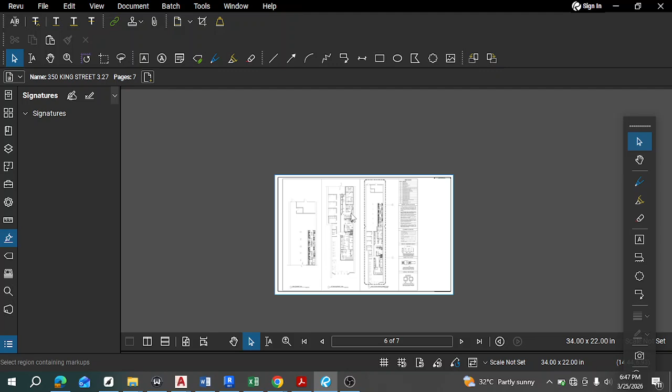Let's look at another design for gas plumbing, right? This is a very large building. It's a commercial building. It's a pizza place and a bar. It falls under the category of bar and dining, right? You can see from here it is a very long building this direction, right?

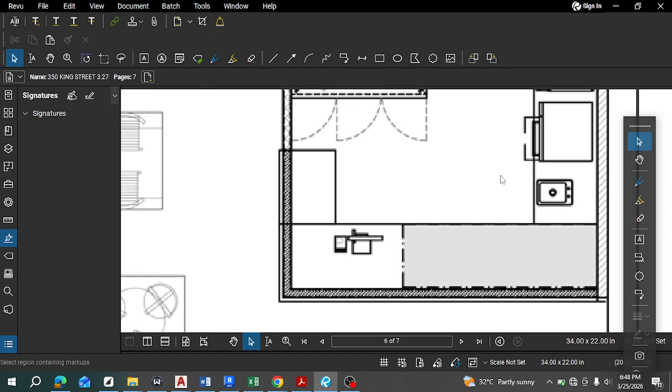Then this is part of the architectural file. They went through the stress of breaking it down for us to look at it closely, because if you zoom in on here, a lot of things get blurry, right? But I mean, they cut it into two portions. This is one, right, from here, and this is two, which is this other part. There's almost two halves, right?

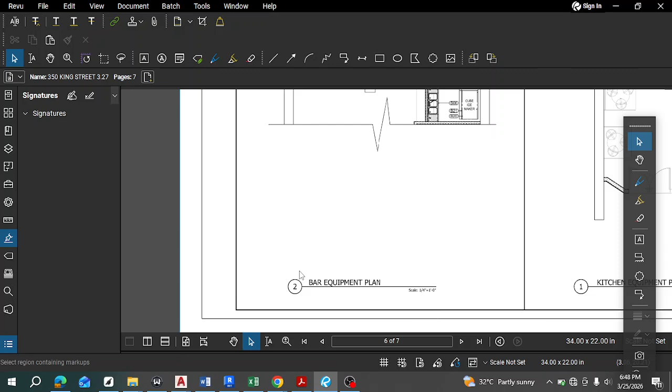So now they came here and showed us what each of them is, rather. They even gave it scale, right? Let's see, the scale here is okay. This one does not have scale, but this one has scale, right? This scale is very important. I know I don't usually talk about it a lot, but it helps in measurement. All buildings should be drawn to scale, right?

Because the whole point of scale is basically saying that every 1/4 inch, every one quarter inch, is equal to 1 foot, right? So that means this could be up to 20 times as large as it is, right? So what this basically means is that if you measure a quarter of an inch here, it is equivalent to 1 foot. Right, so it's important, and I think I've shown you how to do it, but I will show you again today, right?

So this is 1 and 2. I mean, I would have placed 1 here and 2 here if I were the one arranging it, but this is how we came across it, right? This one is the bar equipment, as you can see from here. So this is everything bar related. There's a lot of things really. They even had to start tagging it with numbers, right? With B standing for bar.

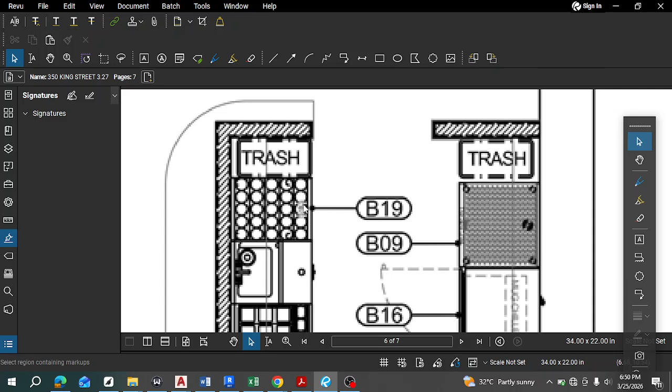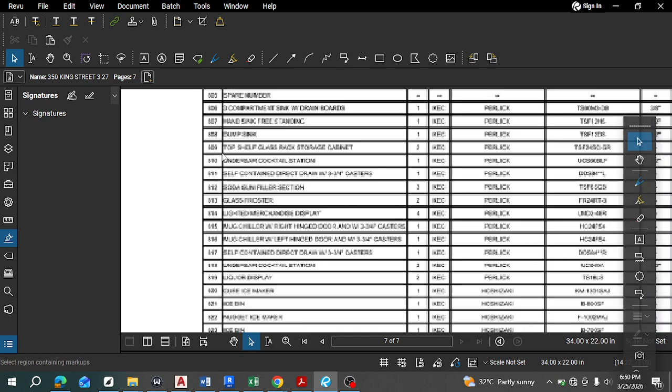So you go look closely. I mean, we are not doing the mechanical and plumbing for this building, right? If not, we would have gone into detail. This is an ice maker or a sink, right? This is B16. Okay, I'm not sure what it is. They actually gave us the schedule to show what each of these things are. That is B16. Let's go for B16 here. Okay, that's a mug chiller, right?

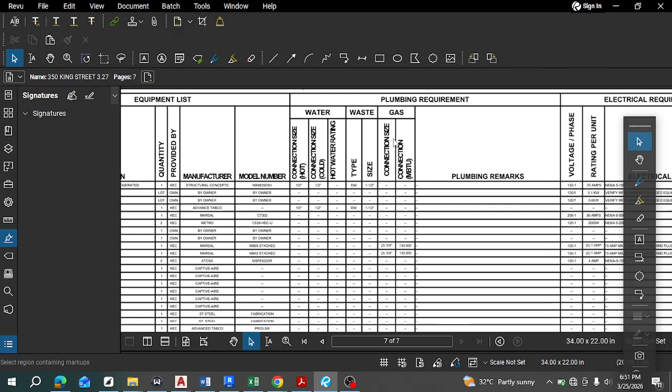So the whole point of this now, after they give us all those tag numbers, this is the rest of what they mean, and to show if it's a plumbing equipment, if it will require plumbing, if it requires electricity, and this is for the plumbing, because gas is also part of plumbing as I mentioned before. So the size, the connection size, and then the quantity, the provider, the manufacturer, all that, so I can research on it, right? And then they went the extra amount. No, this is not what I'm looking for, right? So let's go back to that page, which is here, right?

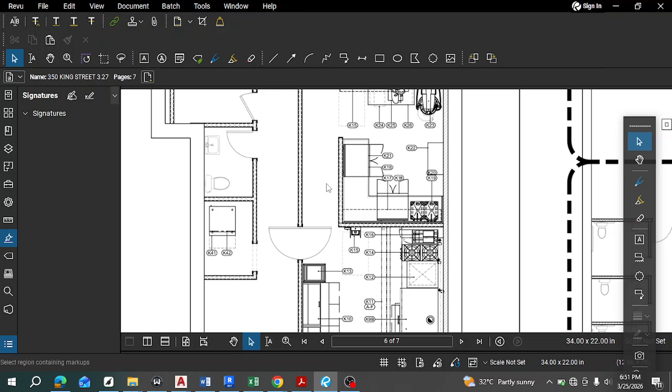So then we go into the other side, which is the kitchen, right? So the kitchen usually has a lot of gas connections, so we'll see what all these things stand for. Then we'll be able to tell. The first part of this project should be understanding the building, what it is for, what the sections are for, the flow into the building, right? The flow into the building and through the building too. So I just want to focus on some things, right?

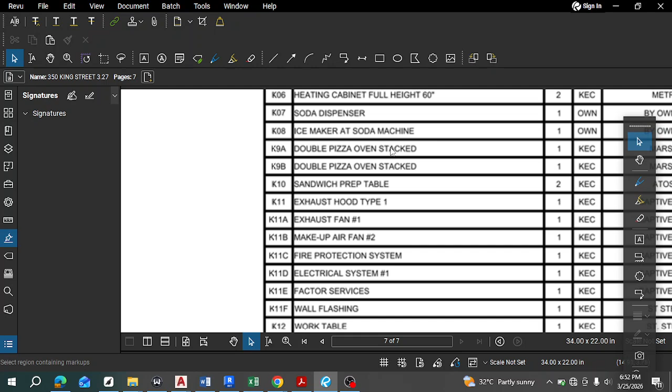You have K16, K14, and K9, right? These are equipment that require gas. K9A, K14, K16. Let's go and look at them. That's K9, 14, and 16. Okay. K9A. That is this. It is a pizza oven. Right. This is the manufacturer and the model, and then this is the connection, 3/4, right? And this is 130, which is the BTU.

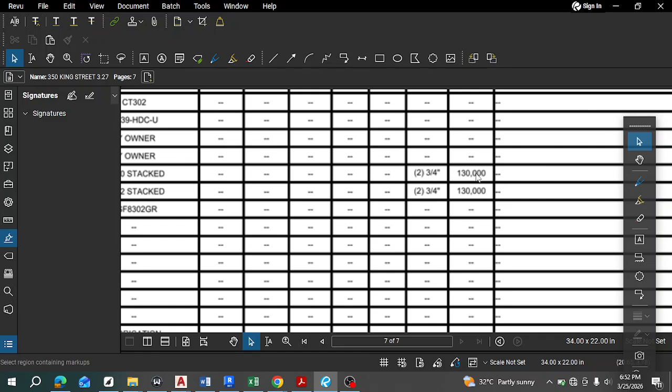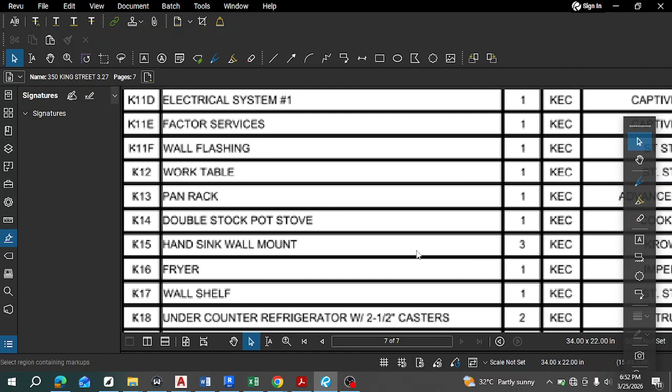Remember we talked about the energy consumption, right? So this is this, right? Then you look at the others. So we talked about K9 now. Then K14. K14 is a double stock pot stove. K16 is a fryer. I've not seen many of these things before, and I don't know if you have, but at least you can look them up to see how they work, or what they look like.

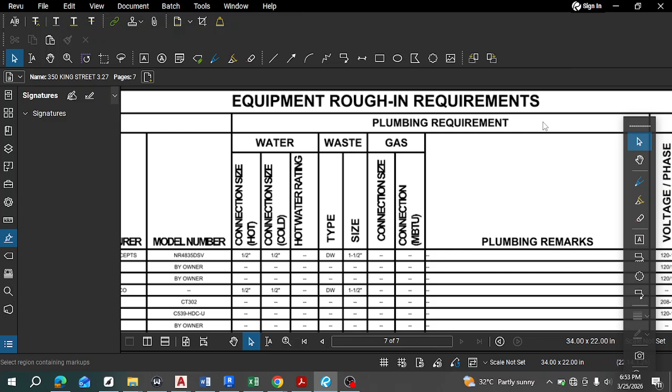So you see this one also requires gas, and anything that has something in this column, because this column is a gas size column, right? So that is just how it works. So they also went the extra mile of giving us a schedule, which is this, right? An equipment sheet rather. So this equipment sheet is very detailed. This has the manufacturer information on it, right?

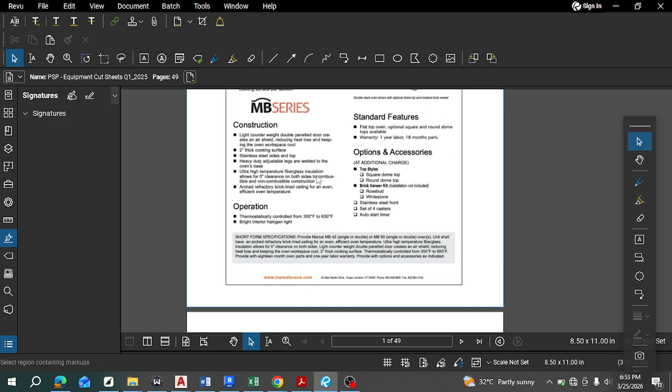Because they're saving you the stress of going to look for it yourself, right? So this is that pizza oven we looked at, right? You can see the name MB series. In the MB series, that was MB something. Then we have MB60. Let me zoom this in. We have MB60, MB42 stacked, right?

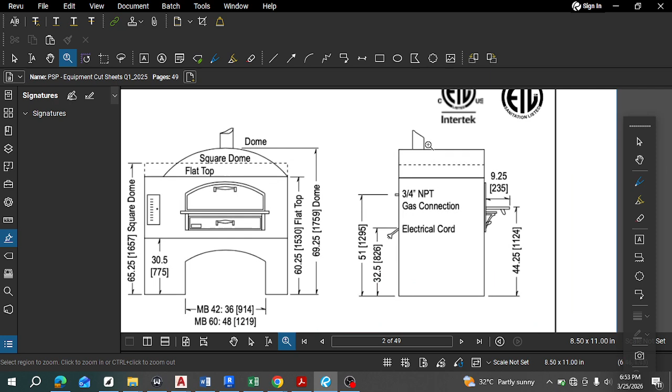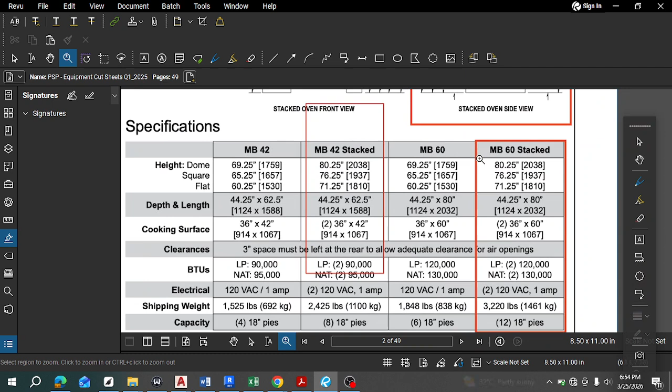So then if you scroll down, we're going to see the different drawings, what it looks like. Okay, this looks like a hood, like an exhaust pipe or exhaust duct, right? Then you come here, you can see more specifications. Then you have the MB42 and 60. We don't need all this information, we need the BTU. Go straight, 130,000 like we saw there. So this is for natural gas and this is for liquid propane.

We've mentioned propane. We've not been designing propane, but in case you ever come across it, you have to understand that propane and natural gas are close, but you cannot really interchange them, right? You ask if it's propane on site or if it's natural gas, and then you work with it. Then you can see there are two sizes, right? One is bigger than the other. That's why they have different demands. Okay. Then what else? K9.

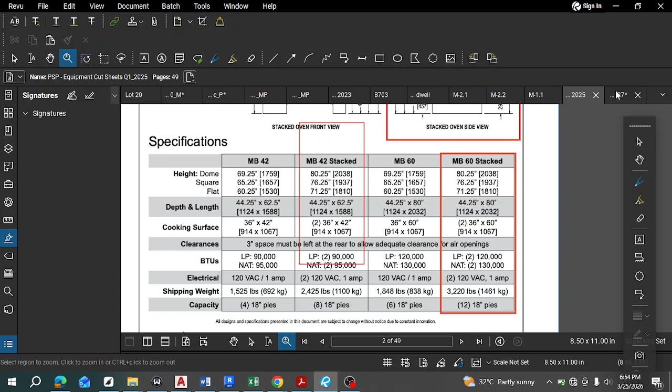Okay, let me not waste too much of your time. You can always scan through it if it's your turn. I recently started to learn how to spend less time, right? So I don't want to bore you with one long video. So let's just let it be as short as possible.

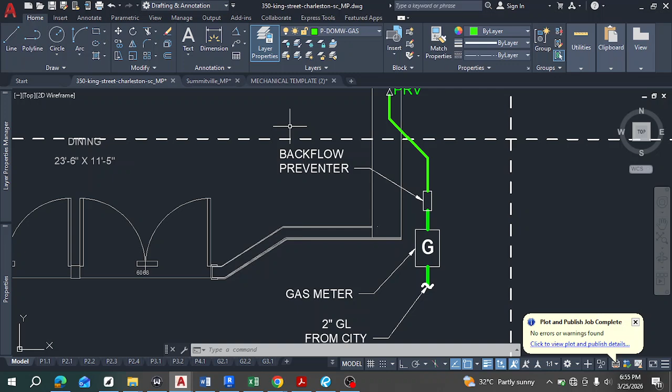So this is that same project, right? I've already done the design, so it's just a matter of looking at it. I'll explain what everything here means. So the usual, coming from the city, this is your gas line. Your meter is used for measuring the amount of gas that's been used, so that when the bills come, you pay accordingly. Then you have a backflow preventer, the type of valve that does not allow it to go back. Then we have a PRV. This stands for pressure reducing valve, a very important element of gas pipe plumbing systems.

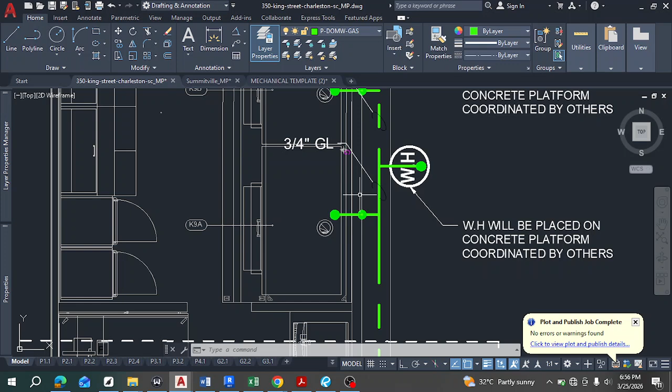I think we mentioned a couple of others. In some cases, you can leave out some, and the person installing on site would use that discretion. There are some good practices, obviously, and there are some things they cannot do without. But it's important that you show as much detail as possible, but if you show everything, it gets too cluttered. Remember, we have flexible connections here, which is how you connect to each of the equipment, because in case of vibration or moving, rigid pipes are going to result in cracks, and you can't afford to have that kind of system.

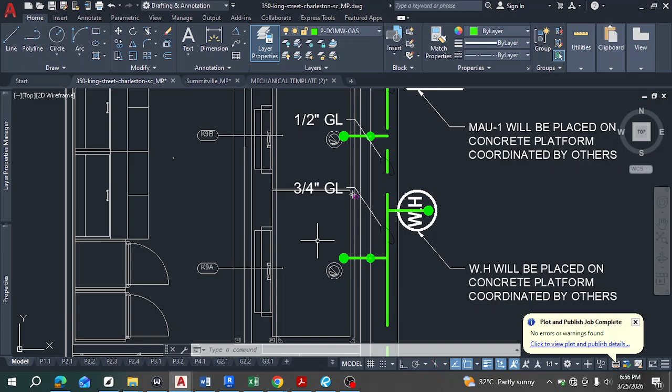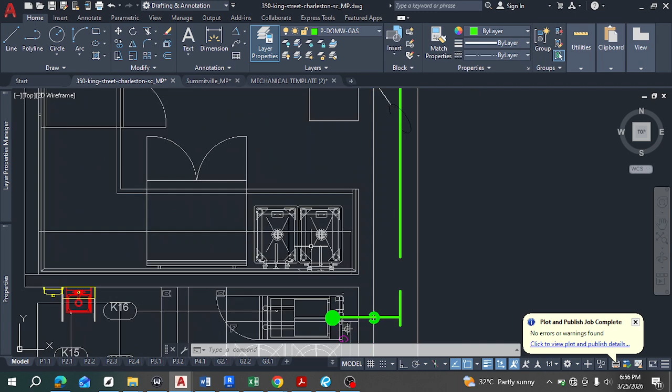So those are our equipment we spoke about. This one is the pizza oven. This is the smaller pizza oven, and this one does not require gas. We can go through the equipment schedule in your own project, but I'm not trying to waste time today. Then this is the stock pot and this is the fryer too. This is a sink. So it continues on its journey. This is the main pipeline. This is a walk-in cooler.

I would have loved to go on about a lot of these things, but you're not doing M or P, right? When I say M, I mean mechanical. When I say P, I mean plumbing. So this is a bath. If you want, I can send you the CAD file to try it out. So you continue up to this point where we have the final water heater. So this is a note.

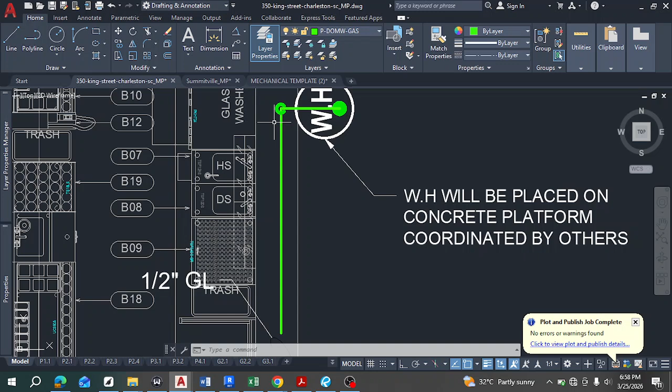This is one of the areas where mechanical drawing has an intersection with other drawings. This concrete platform is supposed to be coordinated by the structural or civil team. There are always different teams working on a project. So this is me pointing whoever is looking at this to the fact that I'm not the one coordinating the thickness and the details of that slab, but there shall be a slab because this is a really large water heater. Don't mind how small it looks here. Then these lines, I added them to help me arrange my layout on the page.

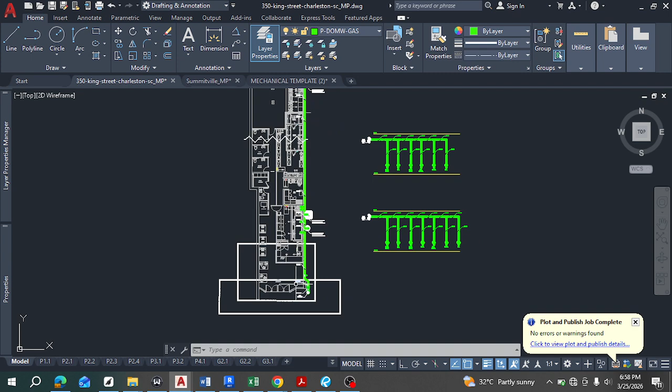So now let's go into sizing of the pipe. Okay, this should be it. Sizing of the pipe. Before we go into sizing of the pipe, let's show you what each of the pages looks like. I can also talk about that skill I mentioned earlier. So I have some notes here.

Then just little notes. As time passes, you develop your notes, you include new information, right? There's even a note I formed. Where is that note? Okay, it's not here. It's on another project, right? And I would like you to also think of notes that you can add to your own project to make it more detailed, right? To provide as much information as possible.

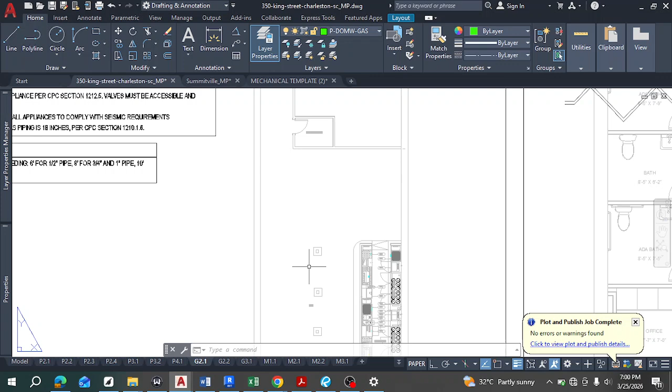I mentioned some information. Let's see if I can still find that. Okay, I mentioned some basic elements or basic parts of a gas plumbing system. Refer to the previous video for that, right? So those are the kind of details you form notes for. You research, obviously, check the codes and look through manufacturer information and see how you can design and include information to ensure proper design, right?

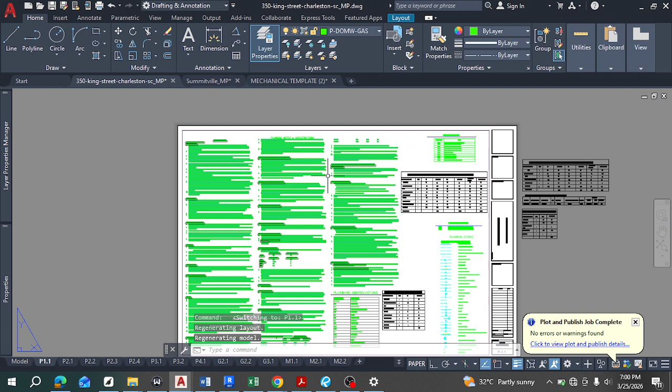This is something that works with your discretion, so I won't show you that because I want you to decide by yourself how you present it, right? You know how we have our layout for plumbing. Okay, perfect. See all these many notes, over time they got formed, so you too can have a similar note for gas plumbing. The more the better, right? To the point, this one doesn't have a lot of notes. That's why I didn't devote its own page to it, right?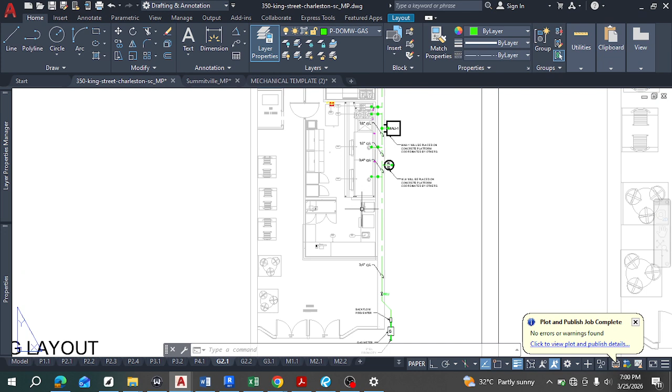So as I was saying, this is what it looks like. You see how different it looks when it's on the layout, and when I print it out, this is what it looks like. The green stands out because I used Truecolor for green. I've told you how to select this, but let's look at it again. More colors. So this is Truecolor. When you select anything under Truecolor, the color will show the way it is. But if you select an index color, it will show only on the model. When you bring it here, it will be in black and white, right?

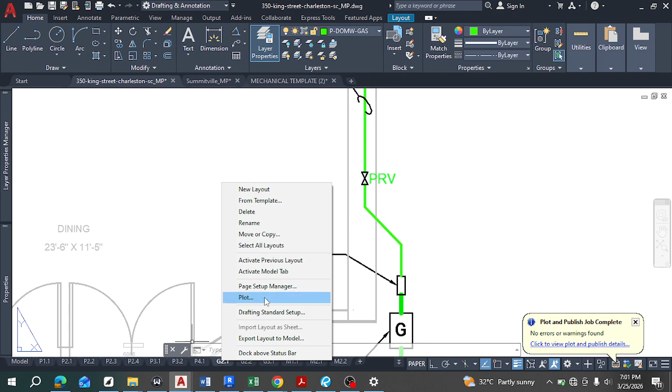So that's why I selected this green. Because if you notice, we usually use green for the layout of our plans, right? But it does not usually show up as green on this. Then another thing to consider: you right click on this, activate page setup, then modify. This is another place where I can make changes.

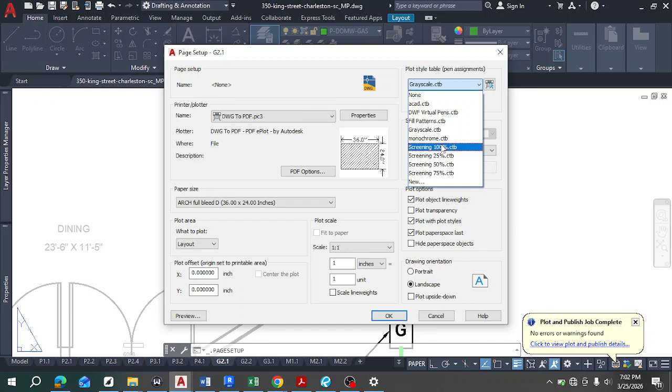Grayscale means the printout is going to be on a scale of grays, from black to white and everything in between, right? In this color setting, there's also monochrome, which is strictly black or white. If it's a dark color, it will show up as black, but if it's a bright or light color, it will be white, right? Grayscale allows for a higher range. So that is important. Other things you know already, right?

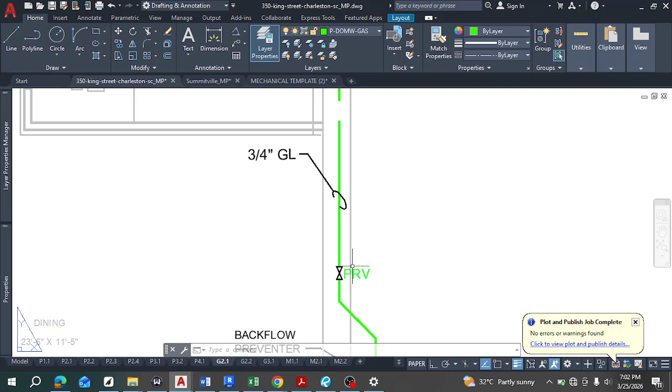So these are the gas meter, then our PRV, which is our pressure reducing valve, very important at the entrance where the gas is entering the system. This is usually more for very large projects where you have different zones. Zoning is always important in any type of system, right? For larger projects that have zones, and this one I just put everything in one zone, you have to put this right at the beginning of each zone, just like fire alarm,

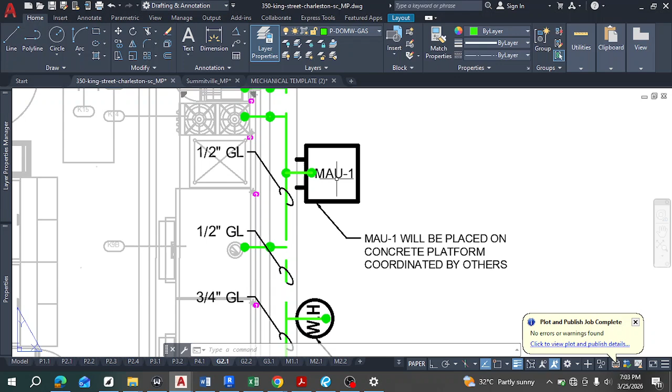because a gas plumbing system is a sensitive system, right? They might need to turn something off. And then there's also the pressure relief valve, and a lot of other types of valves for when pressure is higher than it should be, because it could lead to an explosion. So this is how it's laid out into the pizza oven, the water heater. Then we also have this, which stands for makeup air unit. This is a large kitchen. If this was a mechanical drawing, I would have explained it in more detail, right?

This entire space from here to here is all cooking equipment. Okay, not all. This one is not, but it's something close. So we needed to put in a hood that contains it. I didn't even find one hood; I had to put two side by side, right? So you can imagine the amount of air that was leaving due to the size of the hood, right? Let me even look at it. Never mind. You can imagine the amount of air.

So there was need to add a makeup air unit, because that would have created a lot of imbalance in terms of the air in that space. Some kitchen hoods come with their own makeup air system or air unit, right? But the air will not be conditioned in a lot of cases. And if the air is not conditioned, when it comes in, it's going to disrupt the existing temperature and humidity in that space, right?

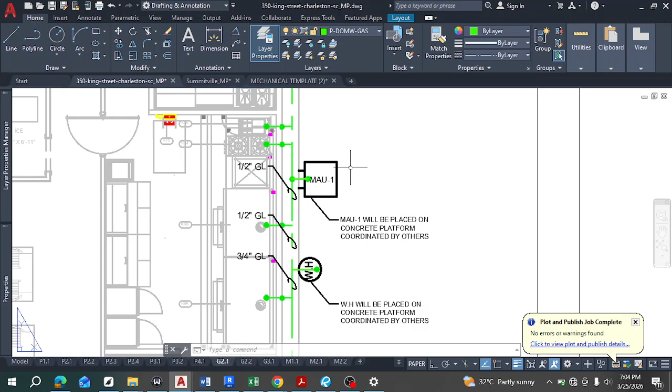So the makeup air unit is like an AC of its own, right? That conditions the air before bringing it into the space. So this one is on the outside, right? And it also has a furnace. A furnace is where gas or fuel is burnt to generate heat, right? So it's part of the system, and that is what is used to heat the air.

We've not talked about it a lot, but a lot of your air handlers have heat pumps, right? That is for the ones that are split. We also have packaged units where they are both together. One is the air distribution module, which is the air handler, as the name implies. The other is the heat pump. That heat pump is where the heat addition or removal takes place. If the room is hot and needs to be cooled, the heat extracted from the room is rejected at the heat pump. And if it needs to be heated up, the heat pump does a reverse cycle to send heat into the space.

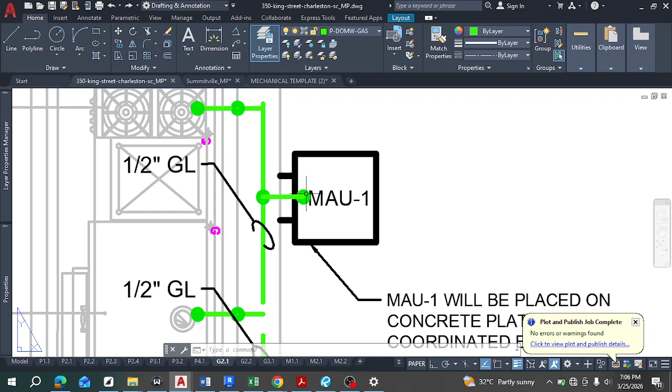Now there are still other types of equipment that can be paired up with an air handler to provide or remove heat, right? There's the furnace, there's the heat pump. We dealt with these things when we talked about HVAC systems, so let's not dwell on that. So this one apparently requires gas to create heat, right? So that's why we added it to our system. You just pointed out this.

So then our water heater. Some clients and some locations require gas water heaters because of the presence of gas, obviously. I mentioned why gas is usually used before, because it can be cheaper. So when you are selecting the location for your gas water heater, select the location that works for both the plumbing system and the gas system too. Even if you're not the one designing the gas, try to make it easier for the person doing that.

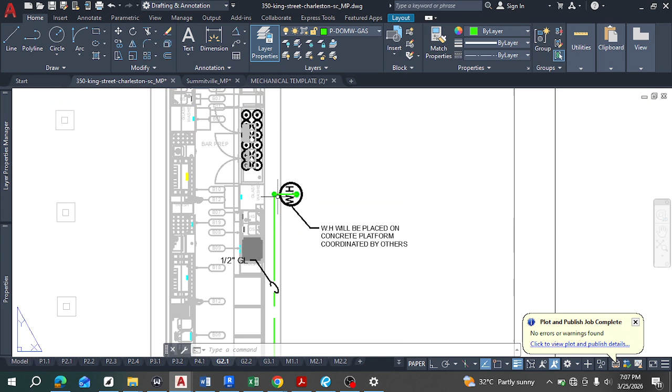And what do I mean? Personally, I like to put anything gas closer to the outside of the building. I don't want the gas pipe to be run inside the building. Luckily for me, this is a long building, so it does not have a lot of width. But some buildings can be large, a square type, for example this part now. If you had something here, you would have had to connect pipe inside of it. I like to avoid that as much as possible, but if it comes up, you have no choice, and we hope our system is safe enough to handle it.

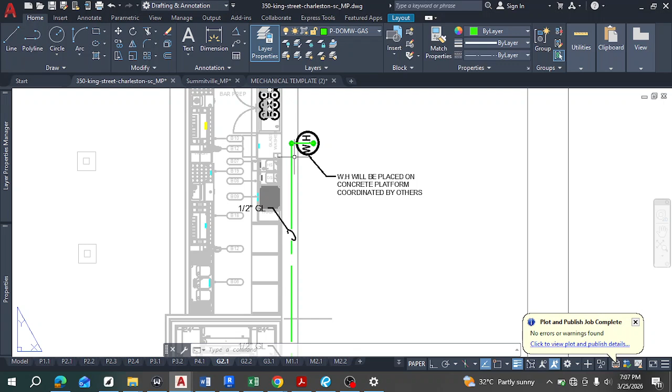This is in case there's a leakage, right? So if the leakage happens, the gas leaking will go out. Although it can also make it difficult to sense. If the leakage is inside, it builds up; it's also a hazard, but somebody can perceive it and identify it. But if it's going outside, the gas can just be wasting from there. But still, as we always say, safety over cost. If you have to pay extra for safety, please do.

So yeah, without wasting much of your time, I think I've wasted a lot of your time already. Let's go into the sizing.

Okay, before we do that, I wanted to show you something else. So this is how I arranged it. You may come across a large building like this. I discovered that I can put everything here, but by the time I print it out, somebody will have to zoom in. They will print it out on physical paper in some cases, or they will look at it on a computer screen. We have to zoom in to see some of this, and you see that they are already very blurry.

So I now had to divide mine into two, and I use these broken lines or zigzag lines to do that. So from here, I showed it here, so now I can see that things are more visible. You could divide it into more, maybe into three places, so that you can zoom in more. So this is a good example of scale. You can see here, the scaling is different, 1/8, right?

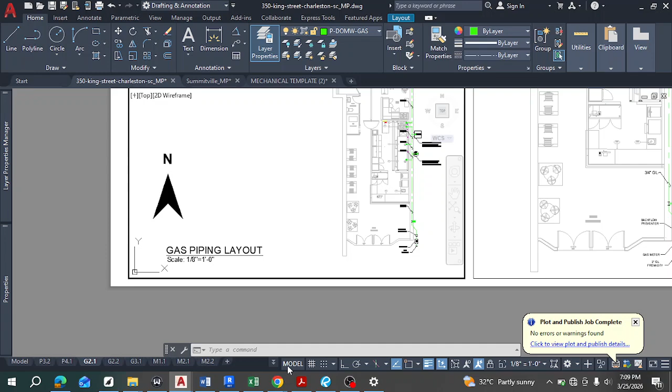Let's double tap and show you. When you double tap, you see 1/8 is here. See where my mouse is? Here. And this is where you set it. You can change it to either zoom in or zoom out, right? So you go back to model. When you put it back on model, if you zoom in here, it does not affect it, right? But you now come here, the scale is different, 1/4. So 1/4 brings it closer.

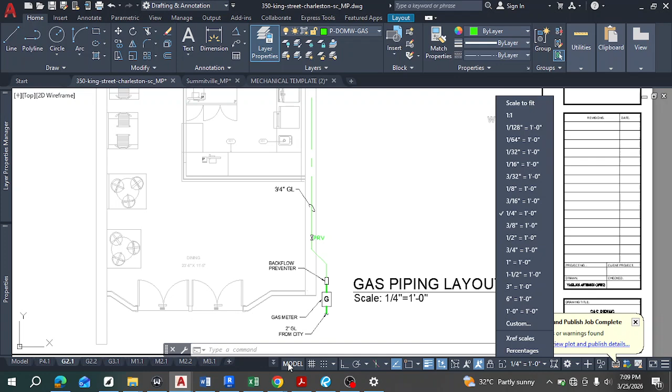So if I've gone as high as 1/2, let's see, it's arranged accordingly. So you come to 1/2, it's going to be even closer, right? But if it gets too close, it begins to be outside your outline, your boundary or your border. Some of the information will be outside the border, right? So that's how you zoom to keep it within the border. Feel free to choose whatever works for you, right?

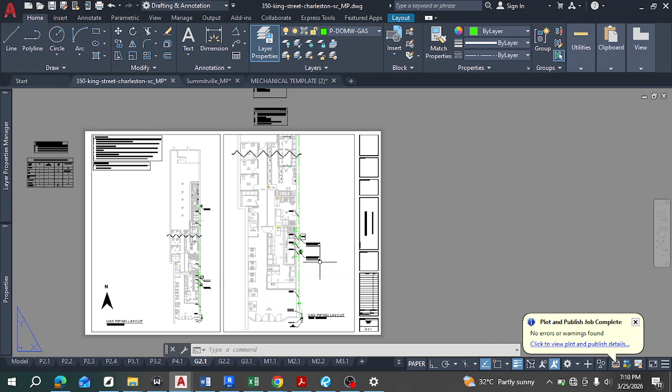Okay, let's go into sizing. I just like to make you understand the whole point, because I believe in learning. It's not just knowing what to do for this. It's about understanding the concept and everything surrounding that information, so that in case you need to apply it elsewhere, it's just a matter of rearranging that information and applying it to the new circumstance, right?

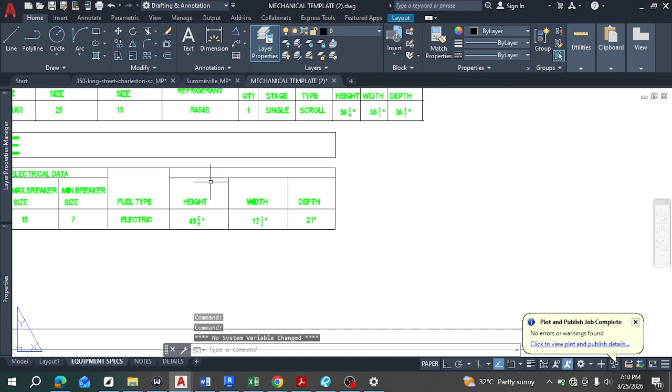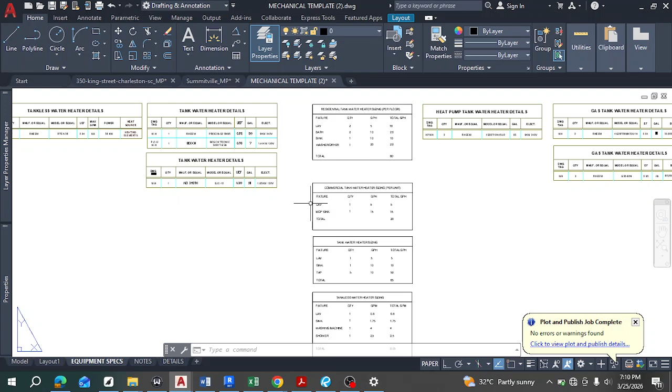So yeah, I have this habit. This is just my personal habit of having these around, so I can always refer back to them without having to search for a different document. Of course, I have a mechanical template document here also, where I fill in information on all the air handlers I've worked on, the sizing, then the water heaters and their sizing too. So if I need to, I can just copy it out and take it over, right? It's just a practice I developed for myself. Nobody taught me how to do it, but I'm showing you. So yeah, let's quickly look into this.

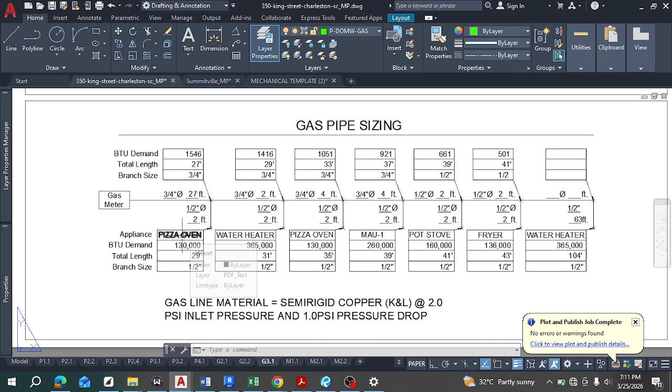This is the gas meter. Then we have our different items laid out. This is more to give you better understanding. Our pizza oven, water heater, and so on. Then we label. You can always do this by yourself, so I don't have to start labeling it here. You can draw lines. All these are just lines and text. You can draw it by yourself. This is a branch. This is a junction.

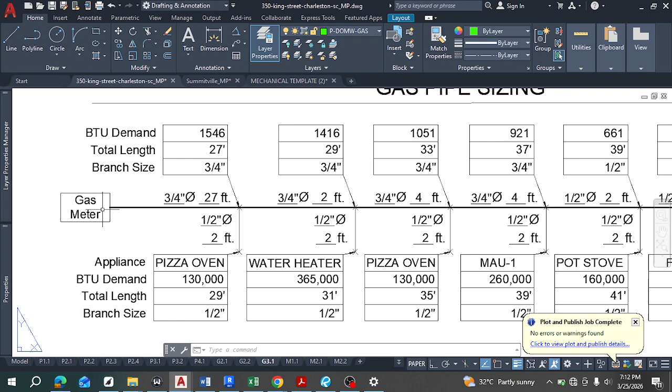So for the first one, we measured the length. This distance is from the gas meter to this junction to here, like we said before. See, 2 feet. That is this branch. This 27 feet is this distance, so it's 29, right? Continue like this. This one will be 29 because it adds up along this distance. Then this is the BTU demand for each of them. And if you notice, at the beginning it is the highest, which is 1546. This is supposed to be in kilo BTU because this is in thousands. So kilo BTU. Let's change that.

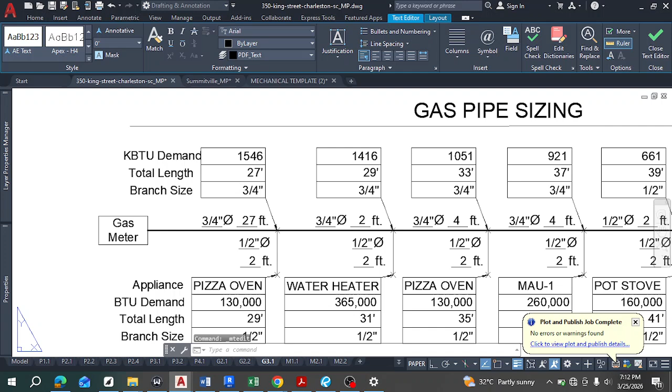Okay, let's move it. Okay, this is kilo BTU because this is times 1000, right? You don't want to write too many numbers. These are the different demands for each of them, and if you notice, this is the largest because this is the sum of all of them. This is where the largest amount of demand is. See that this is a very large system.

So we have our gas sizing. Now let's size; assume that these pipe sizes are not here. You just need the demand and the distance, right? You know how the distance is gotten: 27, 2 feet, 4 feet, 4 feet, 2 feet, and if you see, it's increasing in this direction. That is how this distance is also increasing here, because it's adding as you're going.

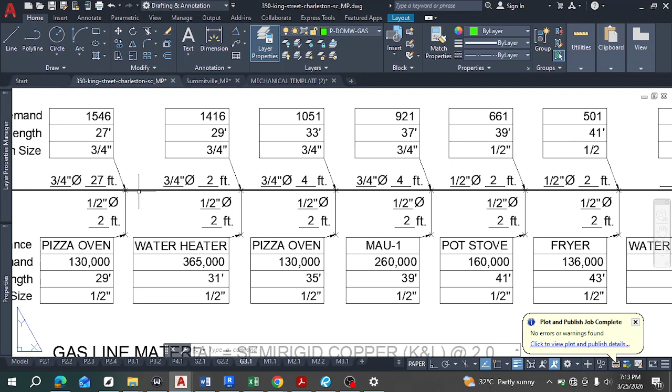So basically, the largest amount of gas is at the beginning, and as the distance increases, the pressure and quantity, everything drops until it reaches the last. So we have to set a system to carry it until that last. For sizing, you start from the last and then go to the larger demand. So our first is 365,000 at 104 feet, because this is the entire distance. This 365,000 BTU has to travel 104 feet to get to this point.

So now let's size the pipe that will carry it to this point. I already opened it up. Before, we used semi-rigid copper; now we're using metallic pipe because it's a bigger system. Metallic pipe is more durable and is able to withstand higher pressures, right? So let's look at it.

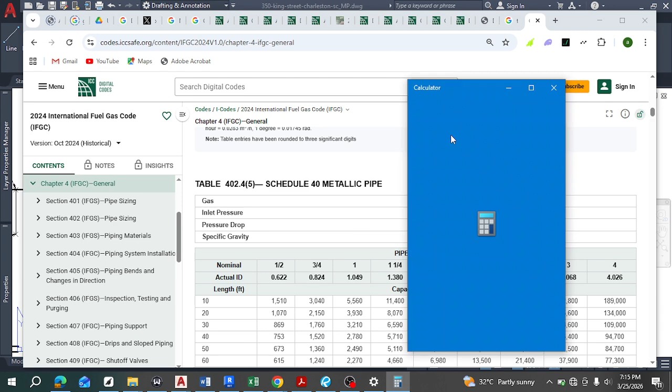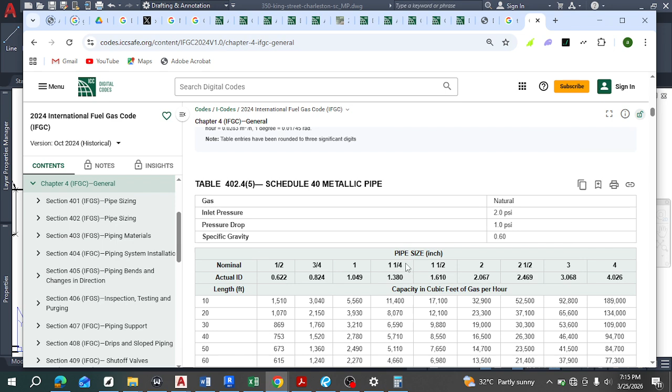Now this is 365,000. Remember that you divide it by 1034 to convert it to CFH. So let's divide it and see. 365,000 divided by 1034 equals 352. So if you look at 352, we can get what we're looking for. This is in cubic feet per hour, CFH. So that is 352 or 353, at a distance of 100 feet plus.

So this is 100 feet plus. You go to 125, because 104 is slightly above. We check our demand, 365,000. If it was more, we would have gone down, but it isn't. So that means the pipe size will be half an inch. That is why we selected half inch for this. The pipe that comes to all these points will be half inch. So we now come to the next one.

This is 136,000 at 43 feet. 136,000 divided by 1034 goes to 131.5, 132, at a distance of 43 feet. 43 means around 50. This works because this is 673; it's greater than. So anything 100, 200, 300, 400, 500 will also work with a half-inch pipe.

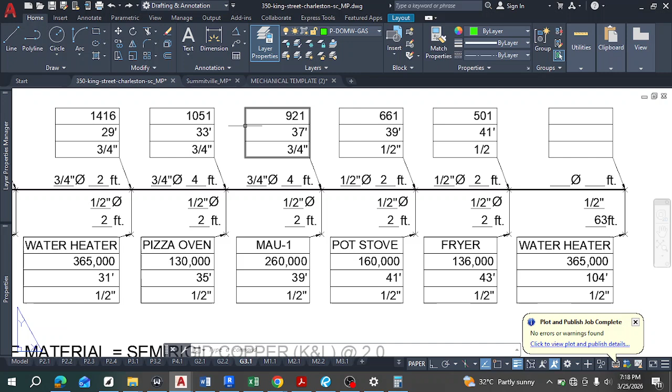Don't confuse it, because it's easy to confuse. This half inch is for the branch pipe itself, not for the main line. Now for the main distribution pipe, I will size it with the total demand, 136 plus this, and that gives us 501 kilo BTU, don't forget. So for sizing this part of the distribution pipe, we use 501,000 at 41 feet. Let's check again.

501,000 divided by 1034, right? Enter. That is 484.5, 485 over a 41 feet distance. So 484, right? 41 feet. 41 feet is around here too. So we use 50, right? 484. You see, it's still large, but it is not larger than this value.

So we can't go into the next column, which is 3/4. That is why our pipe remained at ½ inch. So it means all this distance is going to be ½ inch, right? Because this supplies this guy and then supplies this guy. So as we keep traveling back, the pipe size should increase, but it increases only when it has crossed the line for it to increase, right?

So at this point, 160 for 41 feet, which is close to this, you don't need to be told. It's a no-brainer that it's going to be ½ inch also, but you should still confirm, right? ½ inch. Now for this guy, you see that we've got it to 661,000, and our highest value here is 673. Very close, but this pipe can still carry it. That's why we still have it at ½ inch, right? But by the time we get here, it has crossed that line of 600.

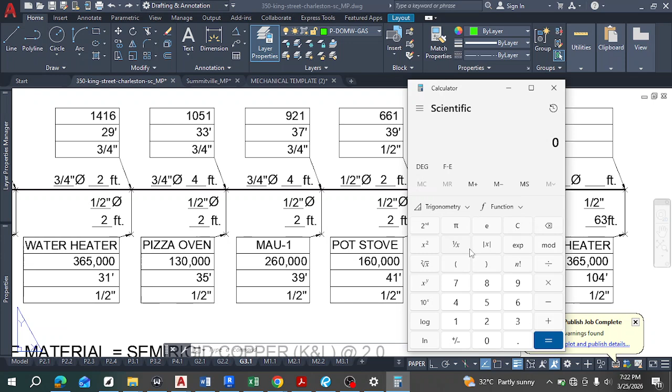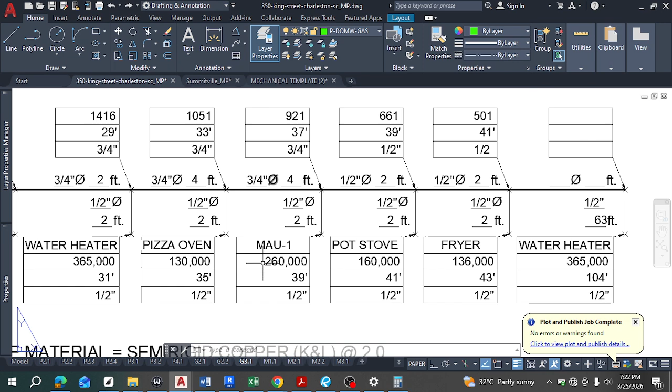But you also notice that as this is 3/4, the branch off of it is 1/2, because this is still close to this value. Let's still confirm it. Always confirm, don't just assume. So 260,000 for 39 feet, right? 260,000 divided by 1034. Okay, 251 over 39 feet. So 39 feet, around 40, 251. It still falls here. So as long as you have a distance under 40 and demand under 753, you are going to use a half inch pipe.

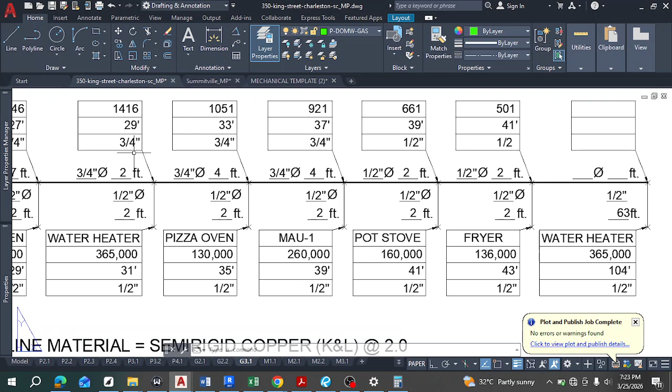And you see, this is the smallest pipe, meaning you can never go less than it, right? So as long as none of these exceed that 700, they will always be half inch. But still confirm, right? So that is pretty much what it means. I mean, it increases until this point. So now for the first point, the highest point, let's confirm the sizing.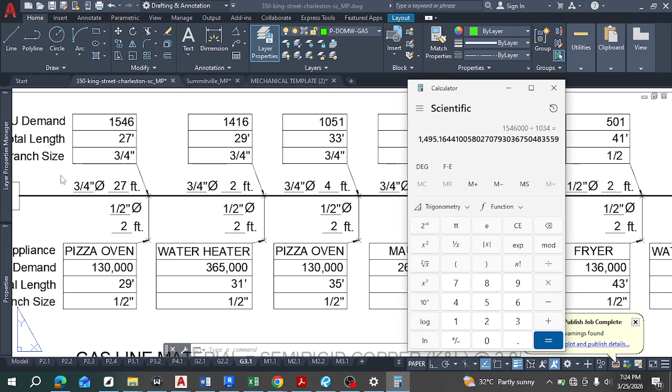1546. We have to confirm that it meets our sizing; it has already entered 1 million. 1546 divided by 1034 is 1495, then at a distance of 27 feet from the gas meter, right?

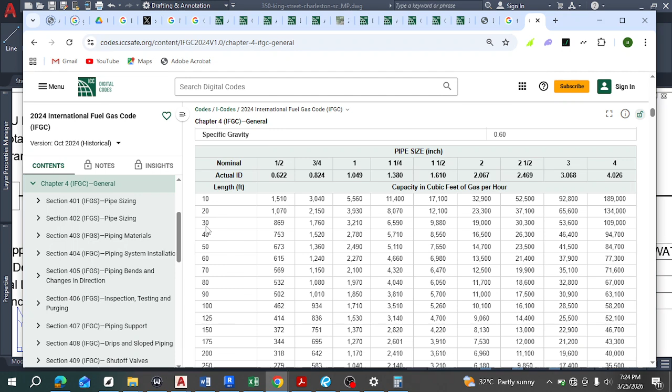1418, 1495, 27 feet, so 27 feet is somewhere here. 30, so 1495, you have crossed 869, so it can't be a half inch pipe, and then you have entered there. So 14, it falls under 17, so this works. 3/4 inch pipe works. But if it had crossed 17, maybe 18, it would have entered this 1 inch pipe, right? So I believe you remember how to measure these distances.

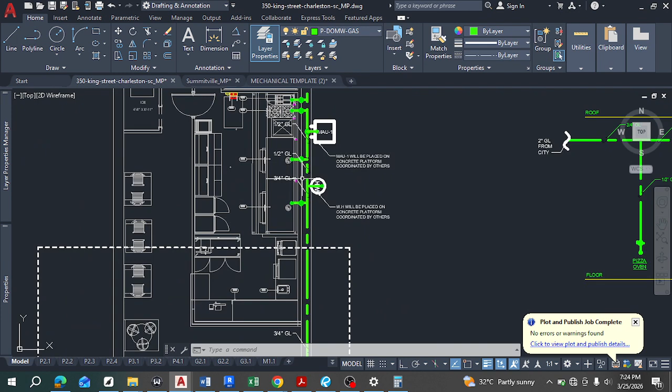These distances, I didn't manufacture them, I measured them, right? So let's go back to this thing for me to show you. As I measured this distance, all this distance is 27 feet, right? 27 feet. Then this one, let's see what this distance is. Okay, let's just see this one because it has this.

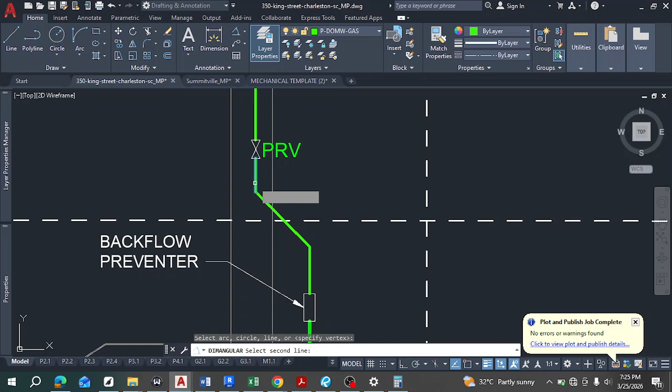Oh, I forgot to mention, when you are changing directions, you shouldn't make it abrupt. It's not a sharp change, right? It has to be at 45 degrees. So let's look at this. This is angular measurement. So let me show you that it's 45. So this is 45 because 180 minus 135 is 45. So if this is 135, it means the remaining is 45, right?

But that's not what we need for this. We're trying to measure this distance. So let's see. Remember, there's linear and there's aligned. So linear works for horizontal and okay. That is because it was not showing me the points I wanted it to click. Okay. This direction. Linear, that's horizontal or vertical. So this is 3 feet. Then press your space bar to repeat the command.

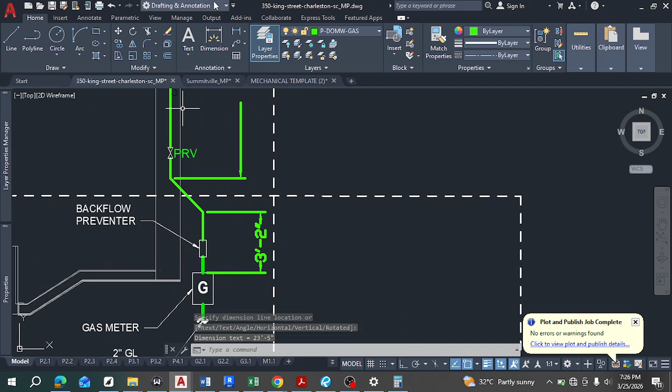Then you measure from here. Alright, I didn't skip it, I'll come back to it. To here, which is 23 feet 5 inches. And then let's use aligned for this because this is not horizontal or vertical, it's inclined at an angle. So this is 2 feet 6 inches. By the time we add up all of this, you're getting something around 27 feet, right? So that's to show you that I didn't manufacture those values.

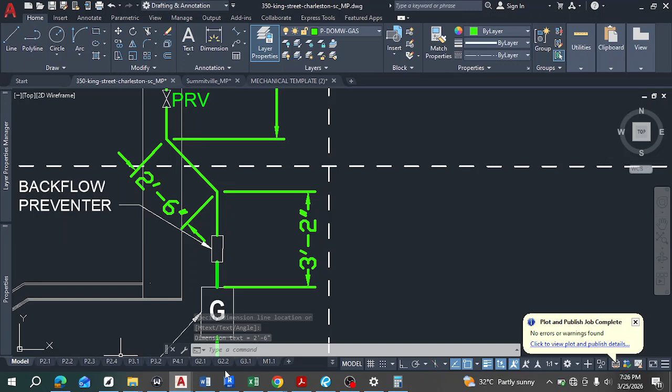And if you go up here too, you can measure this distance and confirm too, and you keep measuring as you keep going because these are branching off. When you measure here, this is a branch. When you measure here, this is another branch, right? So what else? Okay, now let's look at the riser diagram for this project.

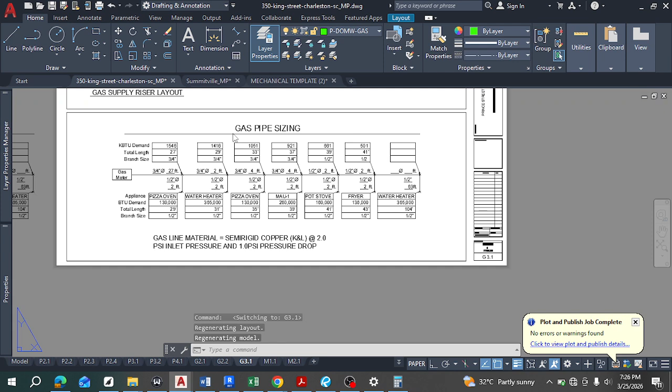So this is our main line. Don't mind that it starts up here. It actually runs underground, because it cannot be in the air, obviously, from the city's main distribution network, and then it supplies our system. It comes here, it drops gas for the pizza oven, then it moves forward, drops the water heater. Now if you remember, these are the branches to each of them, right?

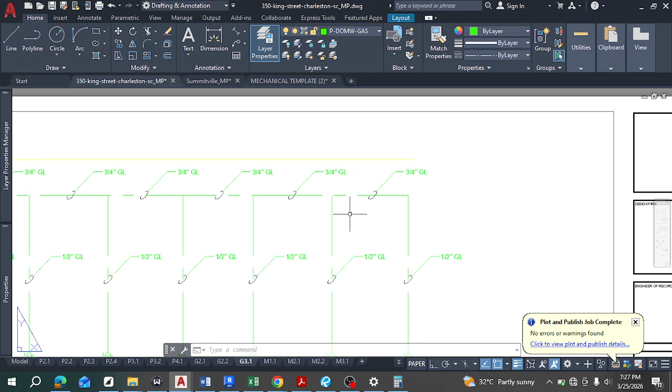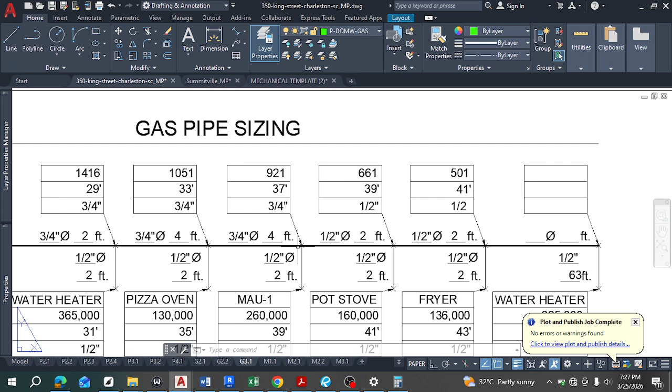And then this is the main distribution line, and you notice it goes 3/4, 3/4, 3/4, 3/4, 3/4. Oh, it's supposed to change. My bad. So at what point did it change? Let's confirm from here. It changed to 1/2 at the point where it dropped and gave our makeup air unit. So it means from that point forward it's supposed to be 1/2 inch, right?

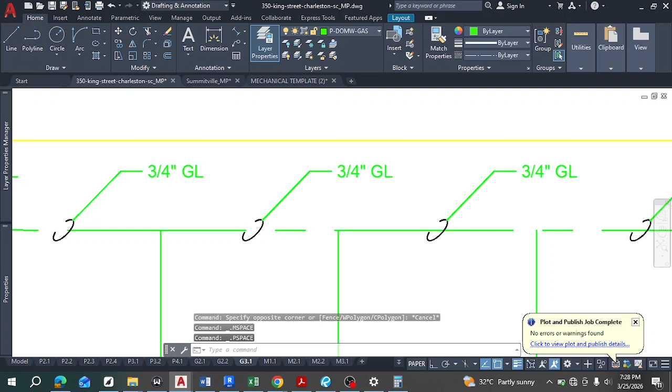The truth is that neither oversizing nor undersizing. Okay, yes, you actually need to. This is actually on the model, so that's why I had to double click to edit it. Alright, so this is supposed to be half. Okay, half. Okay, I can edit from here. You can also edit by the time you turn off that model. You can also do it by clicking paper.

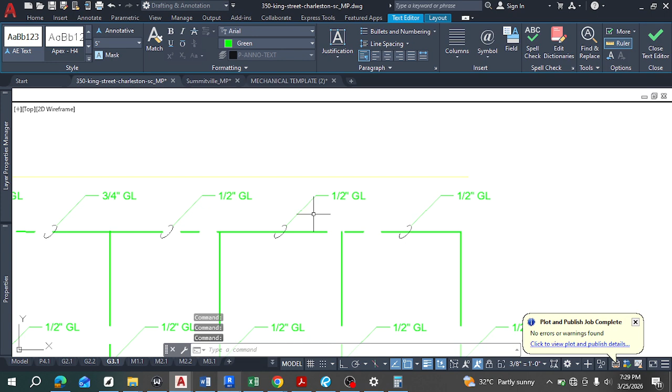If you zoom in, the layout will zoom in, but I don't want that. Right, so all of this is supposed to be half inch from here. So you change it to 1/2. Then same thing here too. 1/2. So now you click your model. I don't change it because I already arranged this page. I don't want this thing to move around too much.

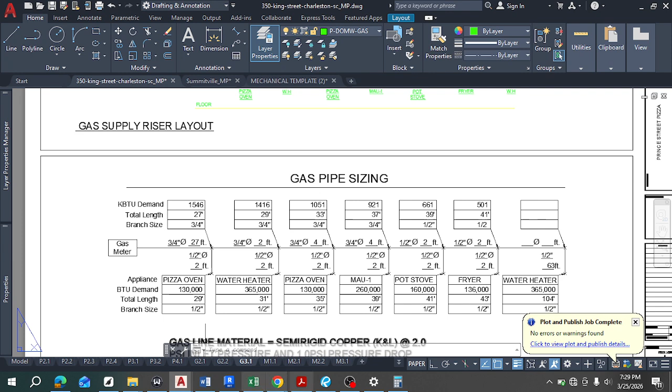Although this one is not to scale, so there was no need to add a scale, I still used my own scale for it. So this is our gas supply riser layout. So that is basically what it entails. Is there anything that I'm forgetting? Okay, notes. Alright, I'll leave that to you, because that is proof to show that you understand what we are doing here. So I believe we've come to the end of today's class. Let's see if there's anything else.